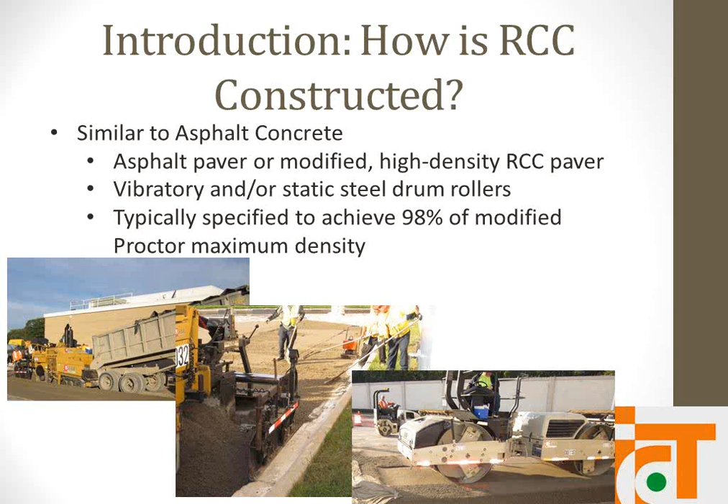Afterwards, it's compacted with rollers. Typically a vibratory roller goes over it first, that's seen in the bottom right. Then a finish roller, just a smooth static steel roller, comes behind it to give the surface a nice finish. Density is the controlling factor, typically 98% of the modified proctor as measured by a nuke density gauge.

So why use RCC? It's cheaper than typical concrete and potentially asphalt as well. It uses less cement, the most expensive ingredient. It's faster construction, you can get more yardage for a given day. You don't use any reinforcements, so you're saving on all that steel cost. And you can also reduce your saw cutting by using longer joint spacings.

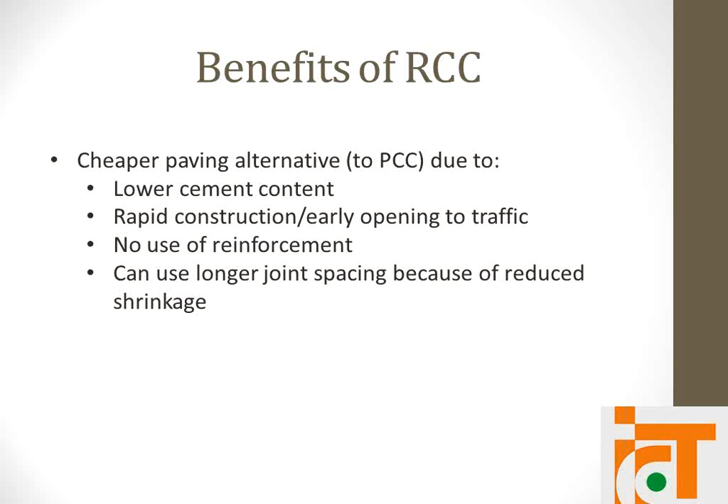Some of the drawbacks are its moisture sensitivity. Since you're designing it based on a maximum density from the proctor test, any deviation from the optimum moisture will either cause the mix to segregate or it won't be able to be compacted to a certain level. The mix design is similar to asphalt, and it's pretty involved compared to concrete, where it's a simple step-by-step procedure. First, you have to choose your aggregate structure, then do the proctor test, and depending on whether or not that worked, redo it.

There are also big discrepancies between field cores and companion cylinders. One thought process behind that is that there are different compaction types: companion cylinders are made with an impact hammer, whereas it's compacted in the field with a paver and rollers. It's a rough surface, as you can see on the right, so it's typically only used on low-speed roads or parking lots, and it's typically about a 45-minute window from when mixing starts to when you can compact it. Otherwise, we get this: deterioration and spalling at the joint, as well as cracking after, I think this was 2 days after placement.

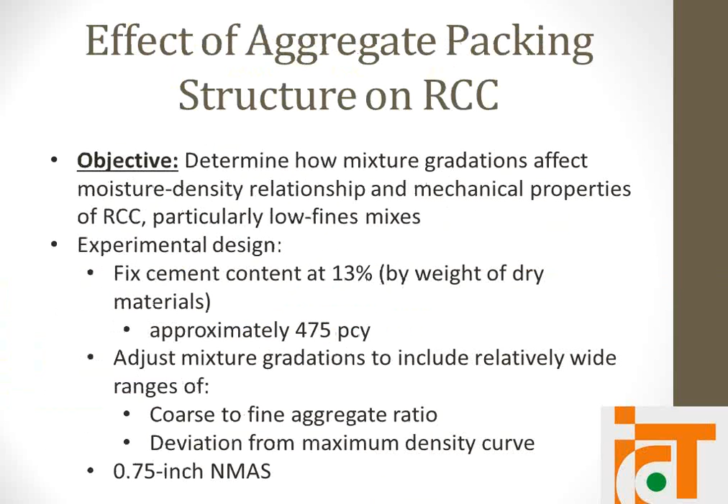This is shown to give us good results, and we thought 520 was a little overshooting it. So for the gradations, the two key factors we wanted to look at were coarse to fine aggregate ratios. As we saw in that mixture by volume, there's a lot higher aggregate content, specifically fine aggregates, so we wanted to take a look at the relationship between those, and also the deviation from the maximum density curve. Typically RCC is recommended to just make the gradation as close to the max density curve and you should be fine. We set the nominal max size at 3/4 inch, which is recommended to get a good surface finish.

Just some of the aggregate properties. We used 4 aggregates in this study: coarse dolomite and dolomite chips that we have in the lab, as well as natural sand and some mineral filler for the higher fines mixes.

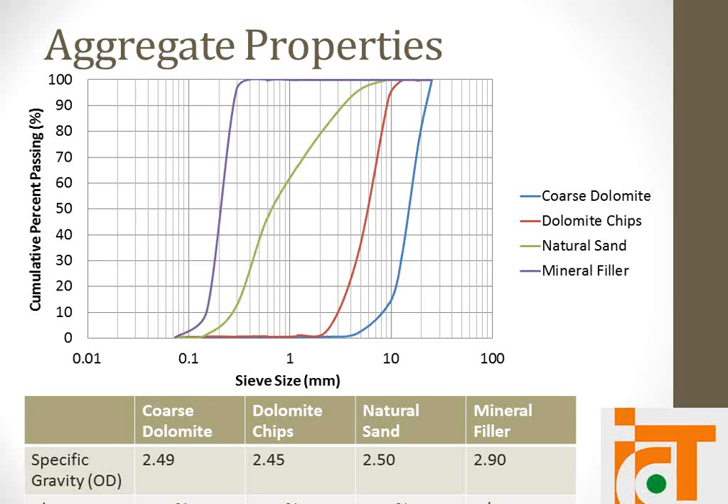Mix 10 has 3% fines, 11 has 6%, and 12 has 8.24%, which is what the max density curve recommends.

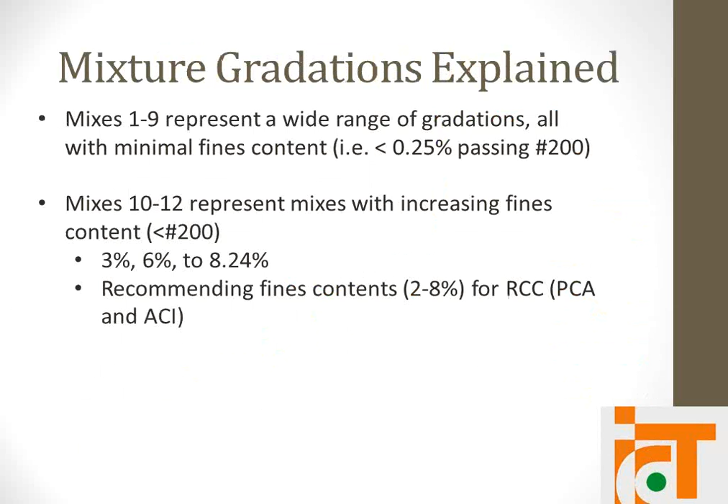So then designing the mixes, you do a modified Proctor test. Anywhere from 5 points gave relatively good curves, and some had to use 7 points to get a good fit.

And from that, you use the maximum dry density for quality control in the field. That's how they would specify the minimum density. And your optimum moisture content is what you aim to batch the concrete at.

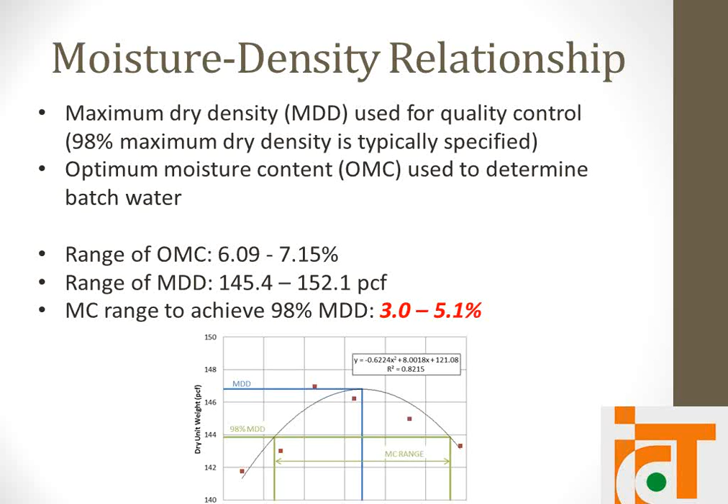And we've seen that it's quite susceptible to the optimum moisture content. If you're too wet, the mix will segregate under the roller and won't support it. And if you're too dry, you won't be able to achieve density.

So to look at the effect of density and moisture on strength, I poured 2x4s out of Proctor samples and plotted here. That red line corresponds to 98% of the density, and the strength decreases about 1,500 psi from the maximum just by decreasing density by 2%.

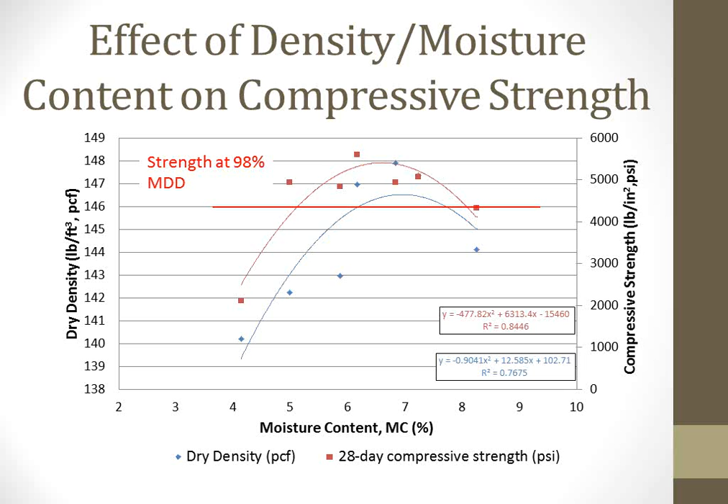So it kind of validates the minimum 98% that is typically specified in construction, and shows the large effect of moisture on the hardened properties.

So then creating cylinders in the lab, you use an impact hammer. What's on there, on the tamping rod, is currently a 3.5 inch diameter tamping plate to make 4x8s, as well as the circular one on the bottom which is about 5.5 inches to make 6x12s.

And currently the ASTM spec only specifies 6x12 inches, but we're also looking at 4x8s. I'll show some results on that.

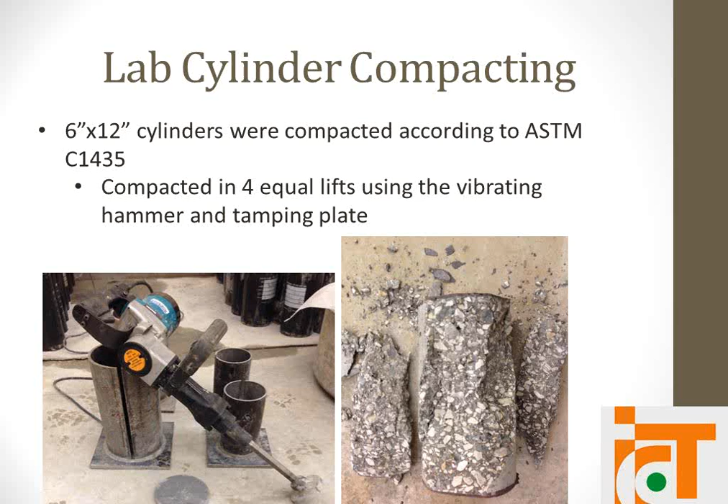So then we had a control mix that was just a typical plain Portland cement paving mix to see how RCC compared with it.

Splitting tensile, the variability for this test is quite large. One thought is that we're compacting in the vertical direction, and we're unsure of the horizontal compaction that's occurring, so splitting it on its side is going against the direction of compaction -- that's one thought process.

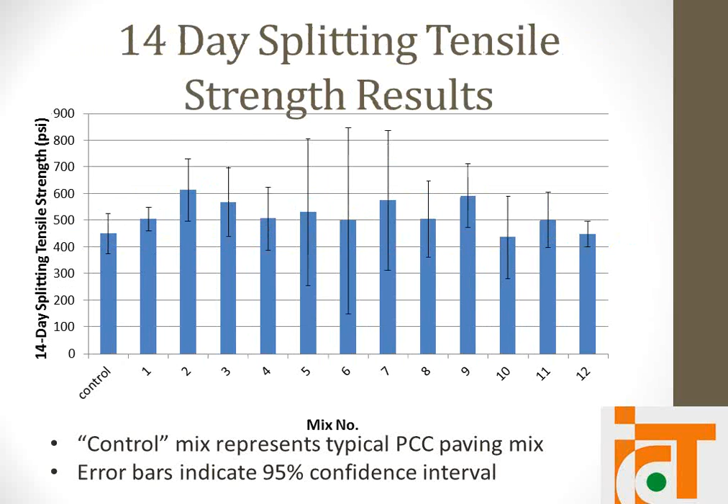But they all compared similar or greater than the control mix.

And then we've also done some fracture testing with Armin's help teaching me. So one of the benefits of using the DCT test as compared to the typical SENB test that's used for concrete is...

There's only an ASTM spec for making 6x12s, which is what you would cut DCT specimens out of, so that works well. Otherwise, you'd have to make SENB beams, which has been done by Alex, and Eric did that too. There's no spec for making those beams.

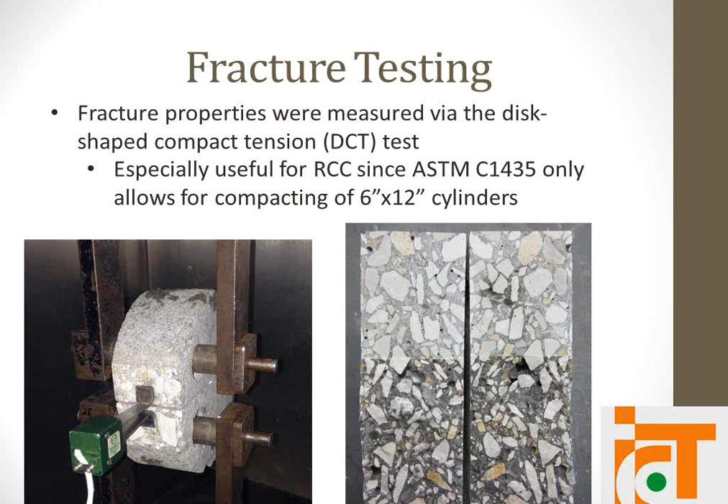So to test using the DCT, we measure the load versus crack mouth opening and load it, and once it reaches its peak load, we unload it to get the unloading compliance, and then reload it again until failure or around 0.1 kilonewtons.

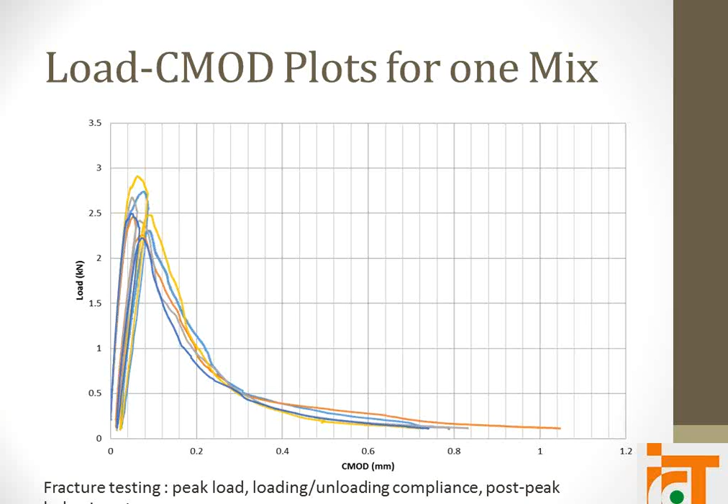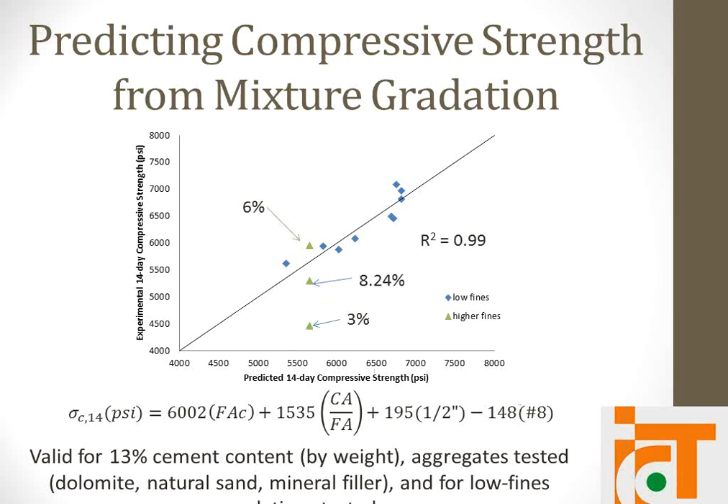Then comparing the 4x8s versus 6x12s, they don't give one-to-one results, but they can be correlated well. We wanted to do this first to use less material—it's a lot less sieving to do, and a lot less material cost.

It's also interesting for testing agencies, since it takes up a lot less room and is easier for them to transport. So we're happy with this.

For some of the other mixes where gradation wasn't controlled, this relationship doesn't exist. It's possible that's due to segregation, or it could be larger aggregate sizes affecting the relationship between the two—that's something else to look at.

But we can relate the two, and with more testing, it could be brought up to ASTM to possibly include the 4x8s.

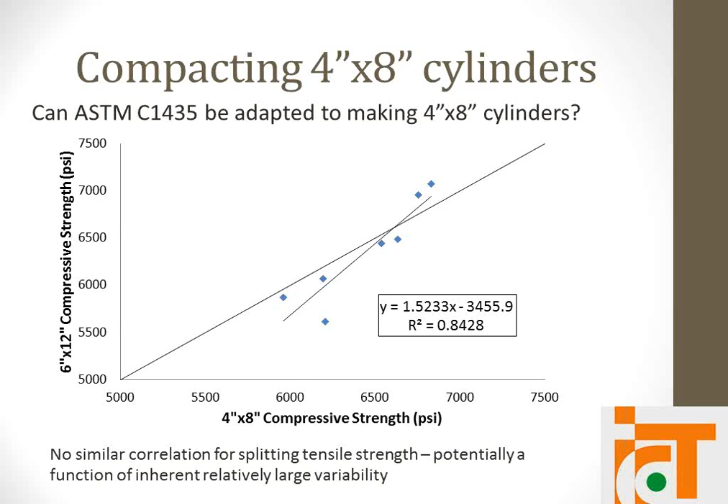So some conclusions we can make are that we can use available concrete aggregates even though they have much lower fines contents than typically recommended, and it can achieve similar strengths to typical concrete—both compressive and splitting tensile. But it is recommended that we either use a larger sample size or a greater factor of safety when designing, due to RCC's tendency to have higher variation.

For the cement content and aggregates used, we can predict the compressive strength just from the gradation parameters. Also, fracture properties are better for RCC than typical concrete due to the higher aggregate content and denser packing.

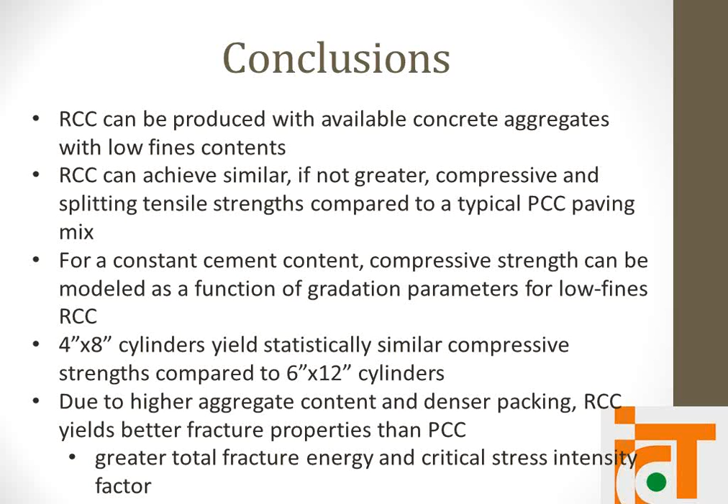Some things we want to look at further regarding the effects of aggregate structure on RCC: are strength and fracture optimal along the max density line, or is there an optimal gradation that yields the highest properties? How do fines contents affect this, and should we include cement in the gradation as well, optimizing the gradation while including cement?

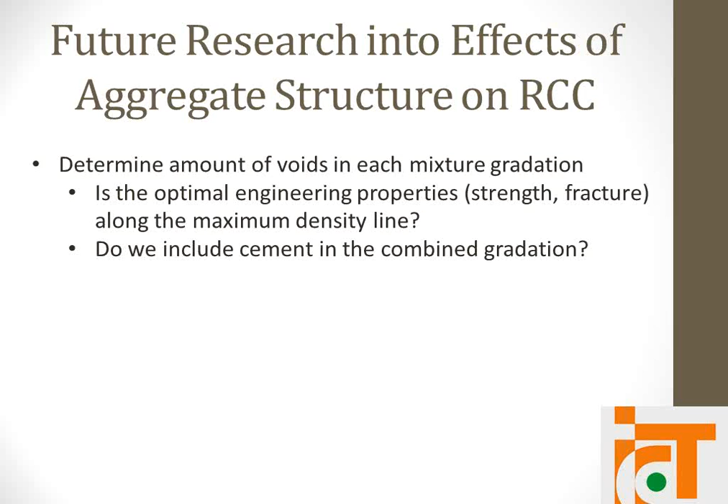Future research for RCC in general includes looking at using the superpave gyratory compactor, with the thought being to correlate better with field cores and companion cylinders. The gyratory compactor with its shearing action will more closely resemble in-field compaction.

We also want to look at fibers and their effect on RCC, since steel reinforcement isn't used and can't be used in RCC. We want to see how fibers will affect the toughness of RCC, as well as whether they can be used to increase the effectiveness of joints or even extend them.

And we want to look at using recycled materials like RAP, RCA, or steel slag in RCC. Since RCC has a lot more aggregate in it, we can get rid of more of those recycled materials by placing them in RCC.

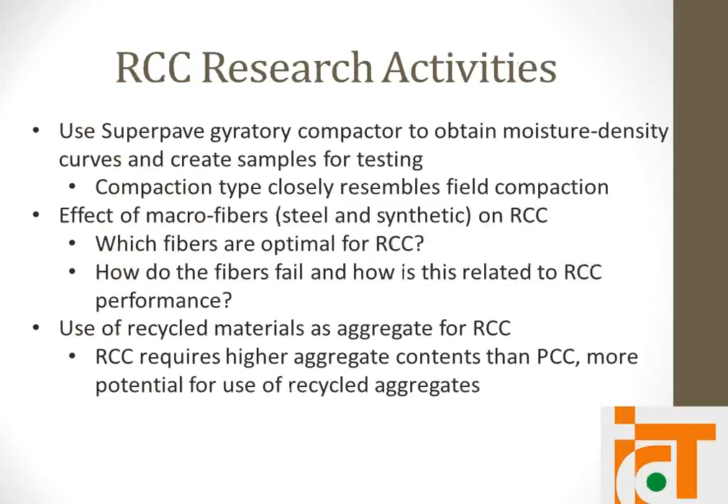That's another thing we are also looking at, especially with the low fines—we're not compacting fully, so we get air voids typical of concrete, but also compaction voids, whereas we're not filling the structure as much as we'd expect.

There's been research on freeze-thaw of RCC, and it's all failed in the lab, but there have been field studies using it in Canada, and it's been there for 20, 30 years and holding up fine.

One difficulty is there's no standard for molding RCC in typical geometry. So people have tried different geometries, and it's difficult to measure the dynamic modulus.

But there hasn't been a lab study that shows RCC passes, yet in the field it's shown to work. So there's a big discrepancy there.

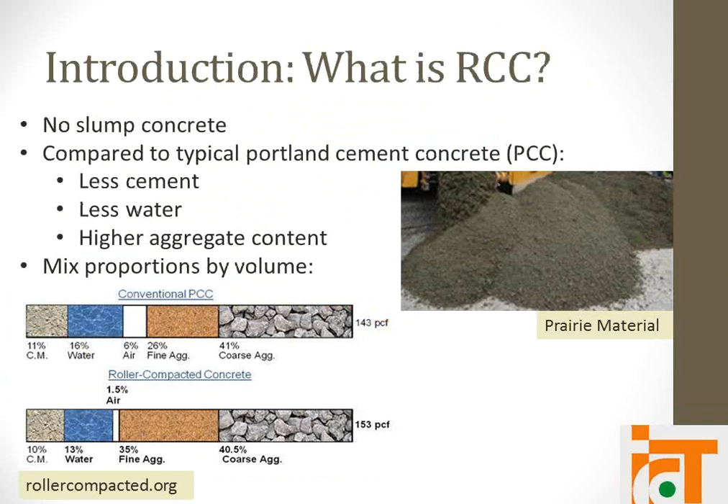What were the differences between the different RCC mixes that you used in your study, basically? So I see control, and then I see like 1 through 10. Oh, control is just a typical concrete mix, it's not RCC. We just wanted to see how RCC compares in relation to a typical concrete. So if it's worse, then there's no reason to use it. But if it's better and cheaper, then why not?

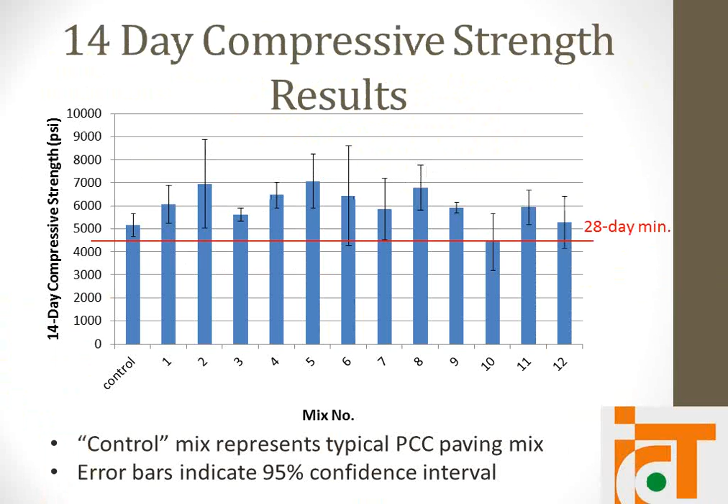But I mean, so are these different mixes, like 1, 2, 3, 4, 5? Yeah, so 1 through 12, the only difference between them is their gradation. They have the same cement content. They have relatively the same optimum moisture. For all 12 mixes tested, it ranged from like 6 to 7.1, so it was a very narrow range of optimum moisture, but it was the same aggregate materials.

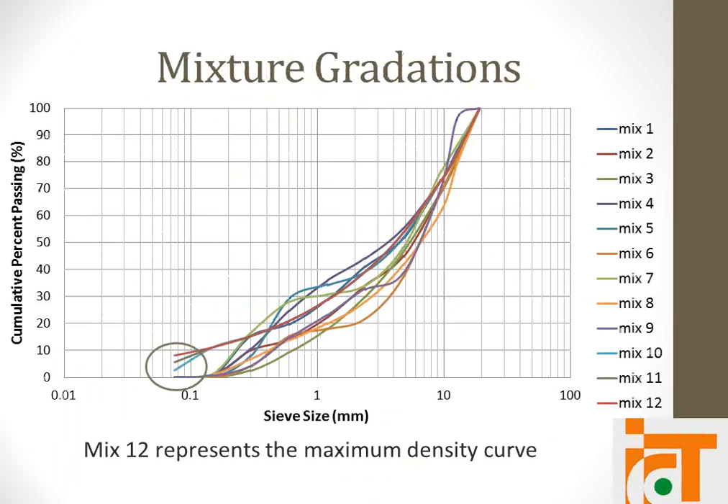And then you probably ran stats analysis on these results, yeah. Did you find that they were statistically different or significant? They weren't. I mean, the COVs for total fracture energy are around like 10, 12%. So we can't really statistically conclude that there's a difference between the control, or typical Portland cement concrete, and RCC, at least for total fracture energy. But from the average values, they're higher.

Thanks, you took away my initial question by mentioning that you were planning on investigating the effects of gyratory compactor. So my second question would be, because in a room like this, when you have a bunch of pavement engineers, it tends to be black versus white, or PCC versus HMA. And you've shown that this has the potential to perform at least as well as conventional PCC, possibly even outperform it. And you briefly mentioned the cost.

Do you have any idea how the cost of this material compares to conventional PCC or even HMA? It's for concrete, I think it's about 70 to 80% of typical PCC. Asphalt, I'm not sure, depending on oil prices and whatnot. And it's typically used as a composite pavement due to its poor surface finishability. So all the studies that I've seen, it's typically anywhere from 6 to 10 inches of RCC with a 2-inch asphalt surface course. Does that cost include labor and equipment? Just total cost, yeah.

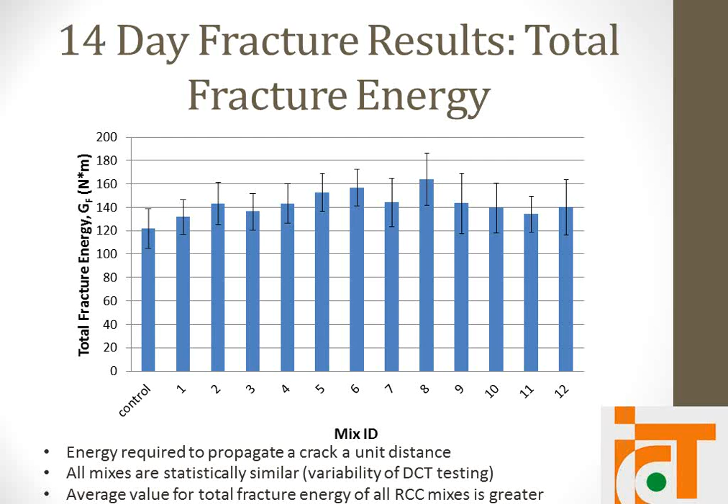Okay, you say overall that it's very sensitive to the moisture content. With that in mind, all of your mixes use dolomite. Would other aggregate sources change this considerably, or is it all based on your Proctor optimal moisture? I haven't seen anything in the literature about how aggregate types affect moisture sensitivity, but in general it is pretty sensitive. There's an optimum, and it falls away pretty fast on either side.

Along those lines, when you make these designs, conventional concrete is by the SSD method, or saturated surface dry. Is that the same method here? RCC is based on the oven dry weights. So absorption would matter. That's what I was wondering.

What did they do with the hole? They left it, but it was being covered. Oh, they're putting asphalt? It was being surface treated.

You early on talked about the production rate of this material being better than HMA. Aaron asked about the cost. Is there any quantification of how many lane miles a day you could do versus HMA? I'm not sure of that. My guess is more, because depending on the agency, you can do between 8 and 10 inches per lift, so you could potentially just go one lift all the way down.